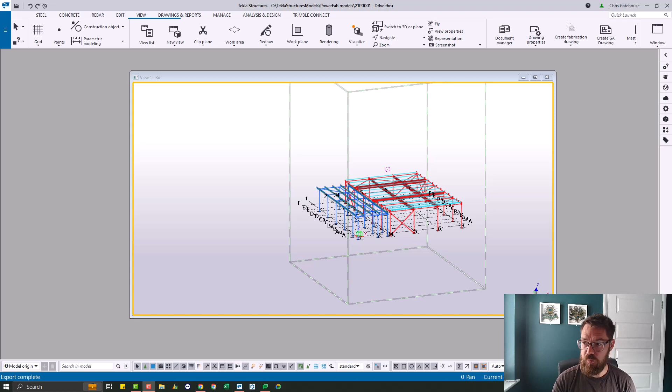Hello, second video. If you didn't catch the first one, I talked about estimating and exporting very quickly, just to show you how to do it. And this video is the follow-up to that, how to export production information. Okay, so this one's a little bit more in depth, but it's going to run you through the steps that you need in order to prepare this model for importing to PowerFab.

And this video is designed for detailing offices, detailers, and before you get to the export, you just need to make sure that you've got the production-ready model, you've got all of your drawings created and edited, and then we'll move forward.

And actually this process should simplify, well, at least for the drawing office, the issuing process, because you're not having to print your PDFs to specific locations, you're not having to produce loads of reports for everything. With one exception, you might want to continue doing the bulk lists, but it should simplify the entire issuing process. Okay, so the only two exports you might want, the PowerFab export and the drawing and the bulk list. All right, so let's have a look at what we need.

So you've got the model, let's have a look at the drawings. That's the views. Let's have a look at the drawings. I do know how to use the software, I promise.

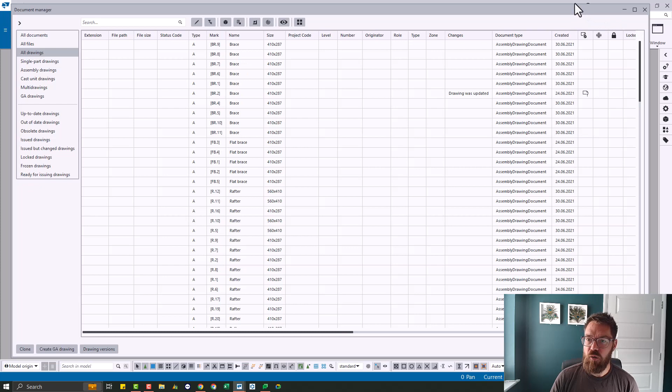Bring up the document manager, and that's enormous. Let's narrow it down. All right, so we've got all of our drawings, okay, and you can see we've got assembly drawings and we've got single part drawings, right. All we need to do from this perspective, once they're edited, is pick all your drawings and then export them.

Okay, so I'm just going to use the menu on the left to toggle to single part drawings. I'll simply select everything that we've got here. We will hit the print button, we will switch to PDF files, and we will send that to plot files and single. Now, whether you print all the drawings to plot files or whether you do subfolders inside those for single and assembly will depend entirely on your marking system.

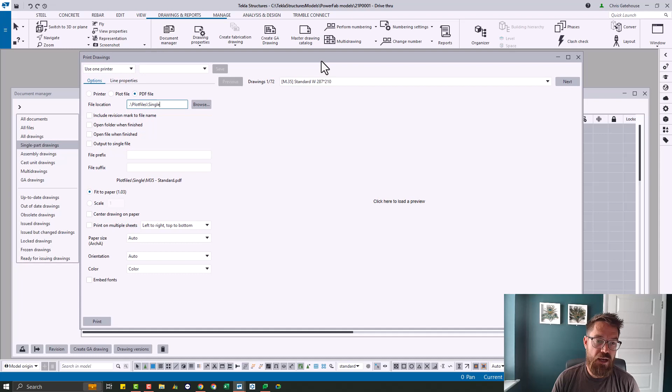Okay, so if you have your part mark dictated by the main part mark, i.e. if you have a beam B1 and the shaft then inherits B1 as its mark, you'll want to be specific about the files that you export it to. If you simply have an assembly B1 and the shaft is marked M1, you can print all of your single parts and assemblies to the same folder. If you've got any questions on that, I'll work specifically with you. But for the purpose of this, I'm going to print them to single just to show you the process.

Okay, so hit print, and that will export those as individual PDFs to that destination folder. Okay, and again, it's important to pay attention to that destination folder when you're doing the printing. So we'll let that finish. When I do the assembly, I'll be quiet and I'll speed that up for the benefit of the video.

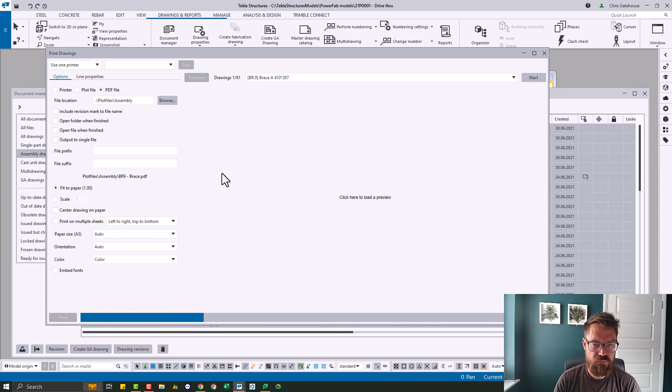All right, so those single part drawings are done. Let's do the assembly drawings. So let's select all of those. We'll hit print, we'll do the same process, but this time we're going to change it to assembly. Like that, we hit print and I'll speed this up. Beautiful. Okay, so we've printed the drawings to PDFs.

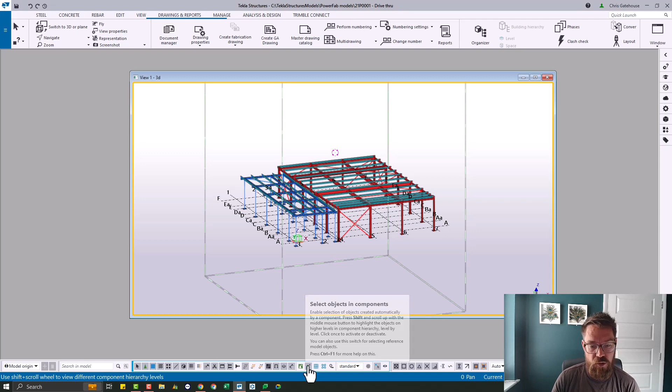The next thing we need to do is to do the NC files. So most detailers know this trick. Make sure you have your select objects in components button pressed, particularly when you're ordering cold rolled material, which we aren't in this example, but we want that pressed so that we pick up the plates. There are a few things that I want to get rid of in this model, mainly the cold rolled items. I don't want to be bringing those into PowerFab because I'm not using the system to order them, although you can.

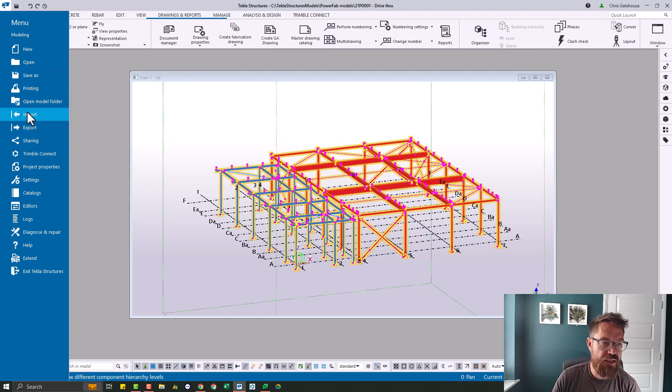So let's get everything that we want to order. Right, good. So the next thing we need to do is export your NC files. So go to your NC files and export those. Similarly to your drawings, we want to make sure that the destination is edited because we want them to go to the same place. So ordinarily, the default settings are DSTV for plates and then DSTV for profiles, but you want to modify those so that they're deposited in the same place.

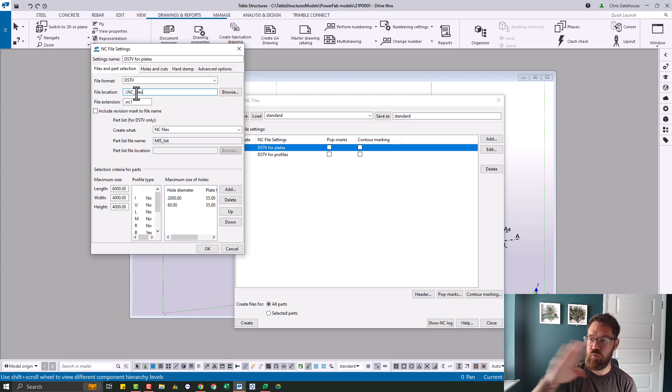That simply makes it easier for you to find the NC files. Saves you having to go into the model folder and moving all the NC files. Just print them to the same destination and then that bit of manual work's done. So you'll notice I've got that to NC_files for both settings. Okay, so once I've got those set, switch it to selected parts, create all of those. That takes no time at all to do. And then that's that.

Okay, so very quickly let's check our exports. So these are old exports, we don't want those. So in the NC files, we've got all of the plates and shaft NC files, which is fantastic. And then in plot files, we have two subfolders, assembly and single. Okay, so we're all ready to go there.

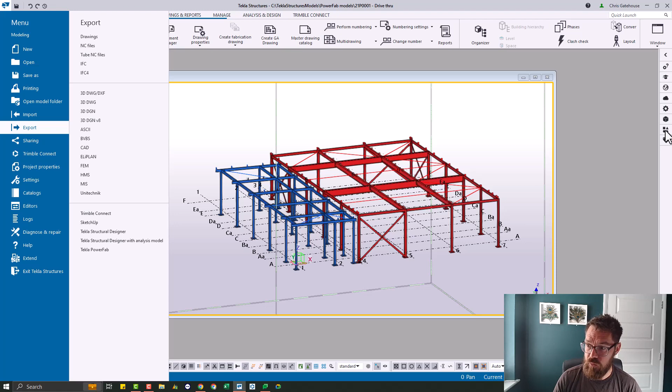Once you've done those, you very simply go to export, Tekla PowerFab. Now this is going to depend on which version you've got. I'm using 2023, so this is built in. If you've got the exporter plugin, you'll find it in your applications and components under EPM. Okay, but it works the same way. So run PowerFab exporter, and then you get this dialog box.

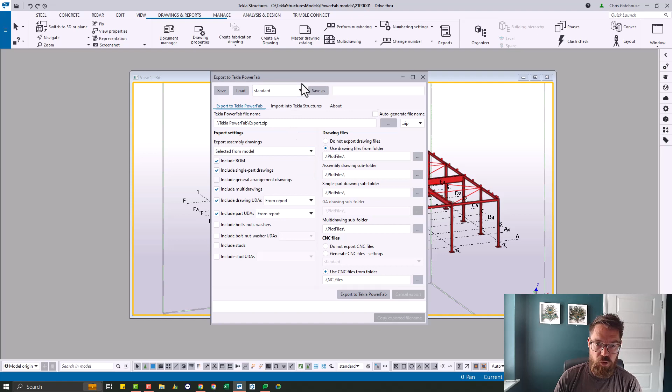Okay, so this is where you tidy it all up. So you want to set this drop down to zip, and then change the name of the export. Okay, so I'm just going to say export.zip. Down the left hand side, you want to pick selected from model. Obviously we haven't selected it yet. We can do that now while it's fresh in our minds. And then I suggest you only tick the top ones. We're not going to be using bolts and studs, so it's not worth having them ticked.

And then on the right hand side, we are going to point it to the files that we created earlier on. So for the assembly drawings, if you remember, we called that assembly. For the single parts, we called that single. And then for the NC files, it was NC_files. Once you've configured this, once you've worked out what works best for you, you can obviously save the settings as a standard file, and then keep that forever, and then you won't have to configure this again.

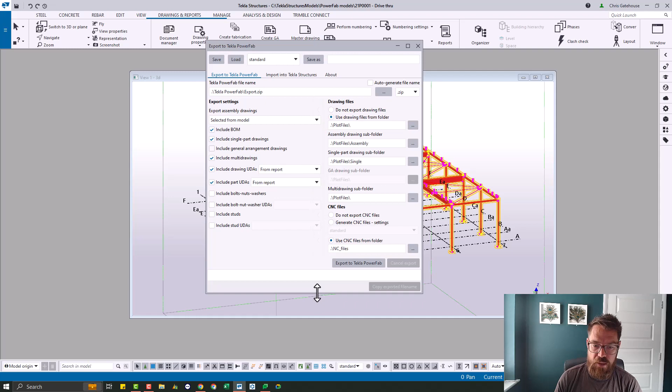But once that's done, and I'm going to expand this to show the error log, we hit export to Tekla PowerFab. It's going to run through all of that. We are having an issue with our numbering, which we've skipped over. We can obviously explore what that means. It looks like it's okay. And there you go, there's your export.

All right, and you'll find that in your Tekla PowerFab folder in the model folder. Okay, so that's inside there. Once you've got that, you're ready to go. Send that to your PowerFab controller and they can import it through production control, and we're ready to go.